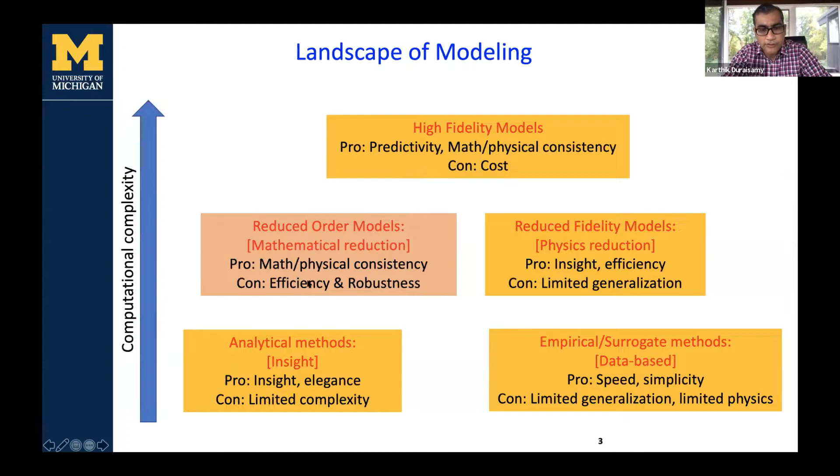All right, now before we start talking about reduced order modeling, let me spend a minute on the broader landscape of modeling. Of course, at the very top, we have the high fidelity models, which are expensive in many problems, but also intractable in others. And then we have two classes of models, and I want to make a quick distinction here because sometimes there is a tendency to mix the two. So we have what are called reduced fidelity models, which rely on physical simplifications like asymptotic analysis or going from 3D to 2D. And then we have reduced order models, which are a more mathematically formal reduction, which means we're going to be solving the same set of equations as the high fidelity model, but on a much lower dimensional manifold. So this is what I call reduced order models, and this is going to be the focus of today's talk.

Now, as far as reduced order models go, there are a very large number of ways in which you can develop them. I'm specifically covering projection-based reduced order models. So you have a given high fidelity model. In some of the applications I'm going to show, you have 100 million or 1 billion degrees of freedom. And then the hope is we can find a low dimensional manifold, and that manifold is informed by data. Then we project these governing equations onto that manifold, and you go from solving an equation with n degrees of freedom to something with k degrees of freedom. In the examples that I show, we basically go from 100 million to order of 100. So the key thing is, how do we extract this low dimensional manifold? It can be done in many different ways.

The simplest way is to use a linear reduced basis. So you go from your high dimensional set of unknowns to a lower dimensional set of unknowns, and the transformation is through a linear basis. But this can be nonlinear as well. And then, as I said, we want to solve the same set of equations. So the challenge here is to ensure accuracy when k is much smaller than n, and also be efficient, because there are many ways in which you can project these equations to a low dimensional manifold, but the resulting equations end up costing the same amount of computational effort, because typically high fidelity models have a sparse structure, and reduced order models have a dense structure.

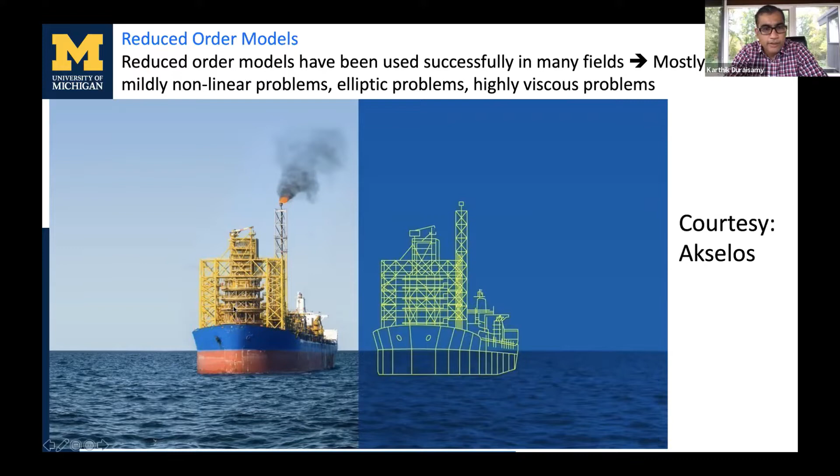Running a high fidelity simulation, as we do for one such injector flow field, has about 100 million degrees of freedom and takes about 1 month on a 1,000 processor cluster. The problem is a real rocket engine, if you take SpaceX's Merlin engine, for instance, has hundreds of these injectors. So to do these calculations, it's going to take pretty much a year of runtime even if you have a 10,000 processor system. So the challenge is not only that it is difficult to simulate these problems and they're highly stiff, it is that it may not even be possible to simulate the full system, but then we're talking about reduced order models for the system. That is the challenge that we are faced with.

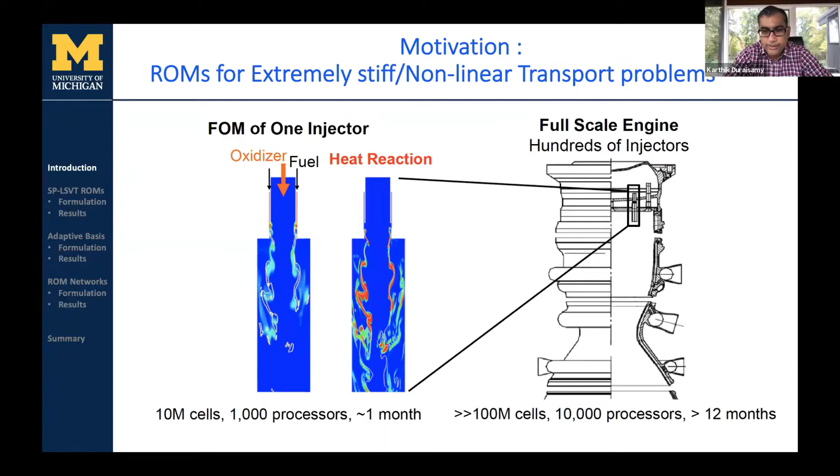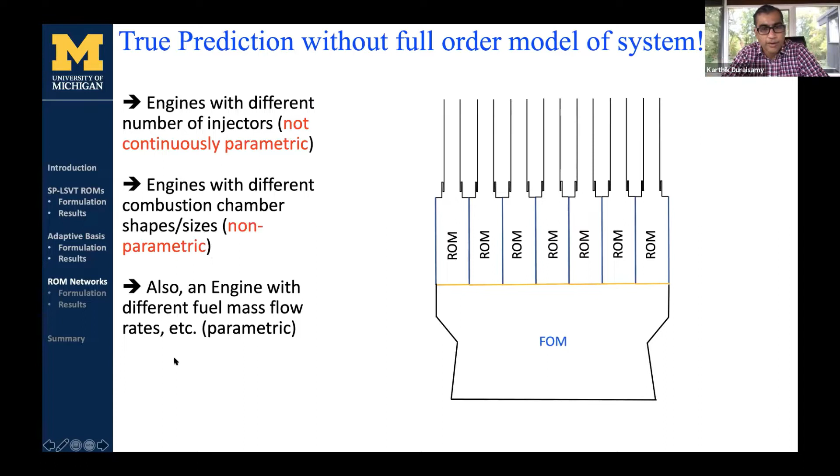And towards the end of this talk, I want to show that not only do we want to make these kinds of ROMs possible, we want to use those reduced order models to explore the effect of: what if I have an engine with 300 injectors arranged in a certain way? How does the flow field change when I have an engine with 400 injectors arranged in a certain way? So these are basically non-continuously parametric problems, non-parametric in the geometry, etc. These are the kind of problems that we want to tackle. All right, so that motivates reduced order models. Now let's go a little deeper into how these are formulated.

So let's say we have what I call a full order model. This is basically your high fidelity model equation. You can think about taking the Navier-Stokes for that rocket, discretizing in space, so you end up with a set of ordinary differential equations of very high dimension. And then, of course, you have to discretize the full order model in time, using a linear multi-step method or whatever your favorite method is. The first step, when you go with linear projection-based ROMs, is to take this high dimensional variable and write it as a decomposition.

The decomposition is you have a reference state, which is steady, so this is the steady part. And then you have a scaling matrix, and then your basis matrix, and then your k-dimensional set of, let me make sure I use a pointer, that highlighter, so you can see it. All right. So you go to a basis matrix, and then a k-dimensional set of unknowns. So this is the reduced representation.

And then there are two very standard ways of deriving the reduced order models. One is the Galerkin projection. You take this basis and use it as the test basis, apply it onto this equation, and you get this very simple set of equations.

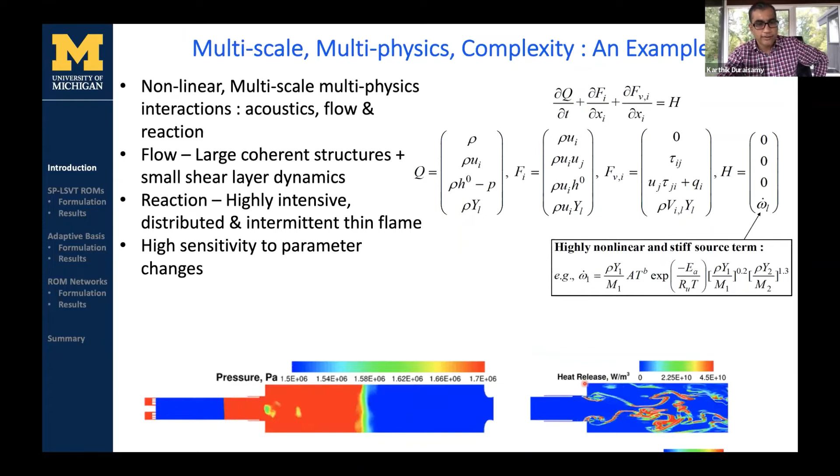So if you look at this image here on the right, and you look at the values for the heat release, I think it will give you an idea how stiff this is. So basically, the state of the art was not good enough to simulate these kinds of reduced order models.

Okay, so today's talk is, can we solve that problem? Can we solve that efficiently? And also, can we be truly predictive, right? By truly predictive, we have to not just predict things that we've not seen before, but we want to do so on geometries that have not been seen before. So that's the challenge that we're going to address.

So I'm going to touch upon 3 things. The robustness and accuracy, how do we make it work? And then adaptivity, meaning how do we make it predictive for future state? This is always the challenge with data-driven models, right? They're nice in principle, but when push comes to shove, they don't generalize well. So how can we address that?

And of course, how can we go after intractable problems using these reduced order models, and how can we enable them? So that's the plan for today. The 3 things to take home again are related to this. The high level picture is, we are going to introduce some new ways of formulating the ROM so that these kinds of simulations are possible. And we're going to be using adaptive bases. So earlier I showed you the basis V to be static, but then we make it adaptive.

And then the third part, we're going to be building reduced order models for these unit problems or components. And then we're going to stitch each of those ROMs together and integrate them as a network to predict things where, like I said, a full order model is not possible for the whole system. But by developing these component ROMs and integrating them, we can enable this. So that's the plan for today.

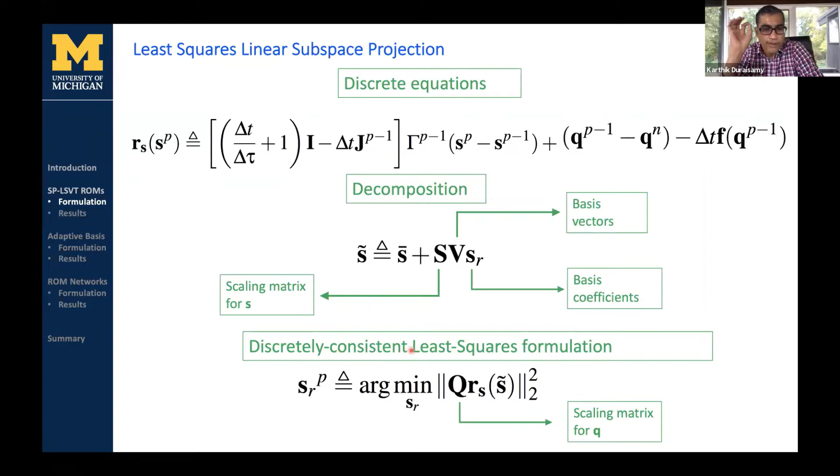So these basis coefficients can be static or adaptive. Just as I said earlier, there's a reference state, a scaling matrix, a basis, and a set of unknowns. Instead of Q, we go to S now. And then we introduce the least squares formulation, just like in LSPG, but on this system, the subiteration system. And then we minimize the residual to find what is the next update in the reduced basis that I need to make. Okay, so this is discretely consistent because every subiteration now is symmetrized.

If you look at the paper, there are a little more details, but at the end of the day, what ends up happening after we do all of those steps is you get a different test basis which changes in pseudo time. So this is how the basis looks at pseudo time level P-1. It has these multiple levels of scaling. And then the actual reduced order model after the projections looks like this, right? So you want to go from subiteration P-1 to P, and then you have these symmetrized transformations.

So after all the steps, as I mentioned, it's very important that we get discrete consistency at the subiteration level so that all the robustness properties and conservation properties are not lost. It's symmetrized and globally stable at the subiteration level. It's conservative. And if you look at the paper, we have some additional things that we do to improve local stability. And unlike the least squares Petrov-Galerkin method, we can apply this to explicit schemes as well, okay? I'm going to skip this.

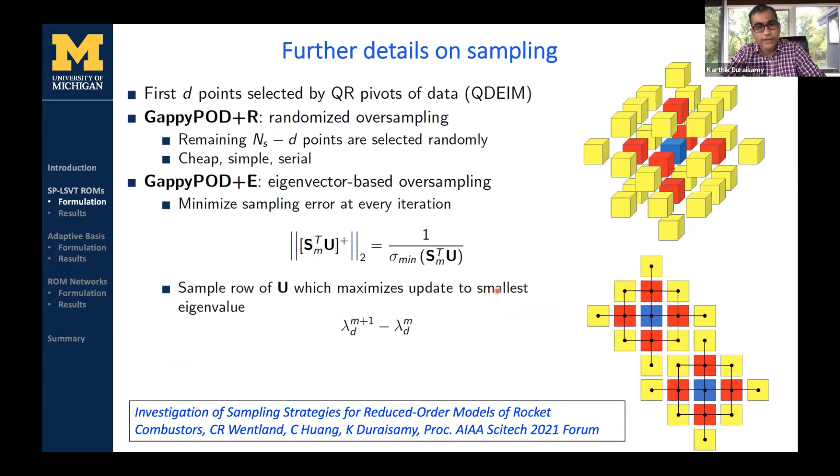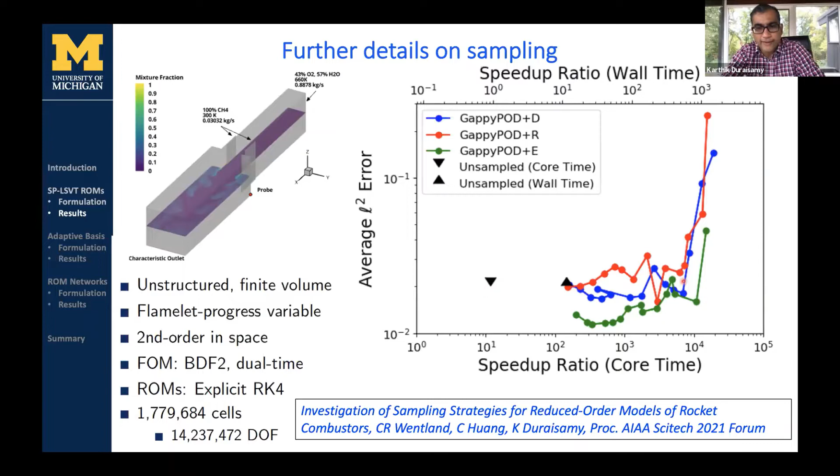So again, this is a little more of a nuance. If you want to reduce the cost of this ROM, you need to do some additional steps called hyper-reduction. It basically involves some kind of sampling. And if you look at this paper, it's very detailed on how we do it and how we implement it at scale. But the bottom line is, after doing all of this, at least for some problems that we've shown in the paper, we can get a speed up of a factor of 10,000 for very minimal loss of accuracy, for a very, very complex problem. So that's the goal. So now let's see some results.

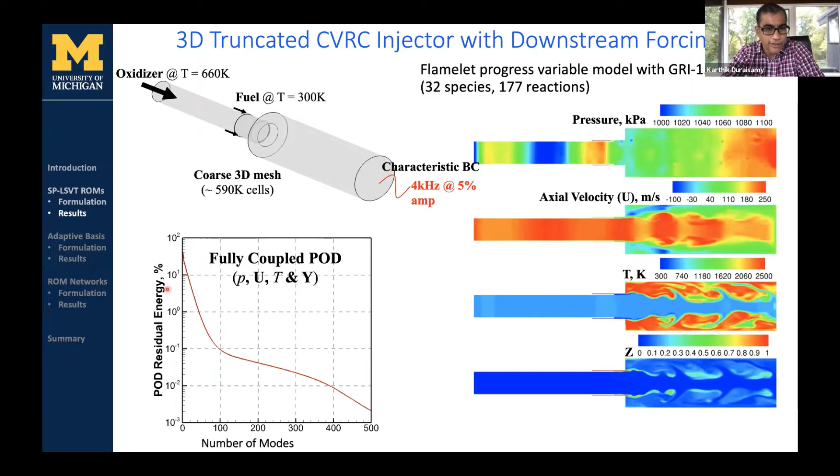So here is one of the problems that I showed earlier. It's a coarse version of it, so we can do a large number of tests. It's, again, a model rocket combustor. Oxidizer comes in here, fuel comes in here, reaction happens here. And this has about 5 million degrees of freedom because each computational cell has 10 degrees of freedom. There are some details here about what kind of kinetics model we're using. But the bottom line is we can achieve significant reduction.

So this is the error with respect to the dimension of the reduced order model. We can pretty much go close to a ROM dimension of 20 to get, I would say, less than 2% error in some of the quantities that we are tracking. And of course, if you go for a higher dimensional ROM, your error decreases.

So here are comparisons of the flow field. This is the full order model with 5 million degrees of freedom. This is the reduced order model with 20 modes, 20 degrees of freedom. And here is a reduced order model with 60 modes. The paper will have more information on how much the cost reduction is. In this case, we can report about order of 1,000 reduction in computational cost. Okay? So these problems are possible.

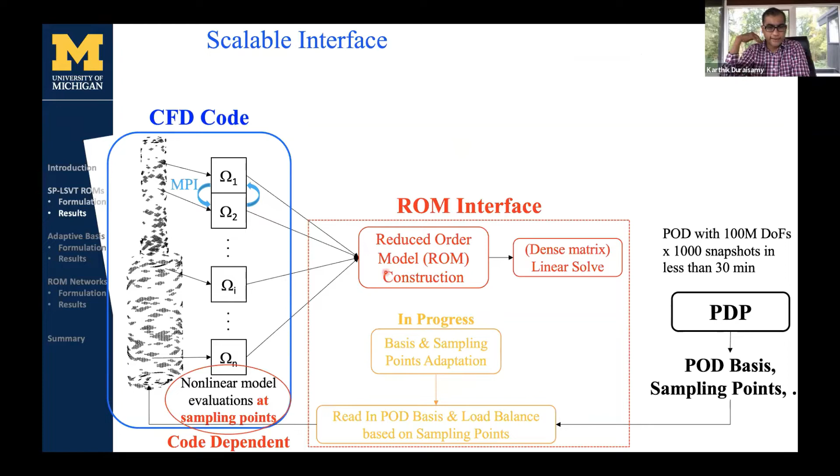And again, more of a nuance here. We built the infrastructure in a modular fashion so that it can scale and it can be used by others.

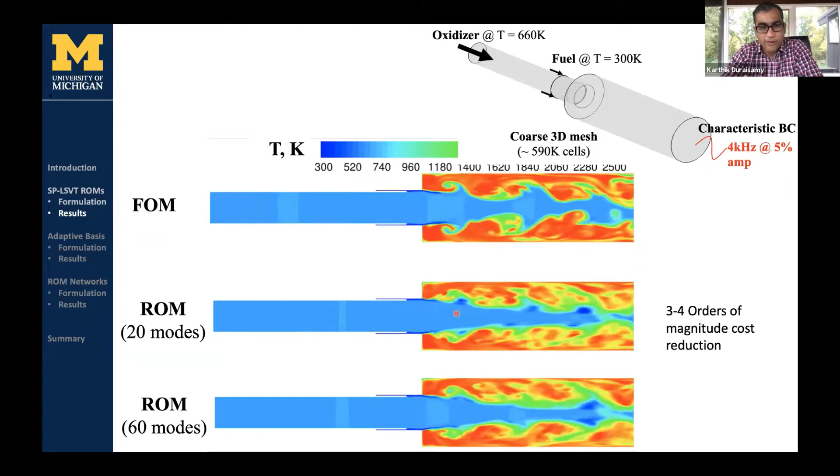Okay, so everything was good, but what are the disadvantages? So why do we need to do more? It is the fact that, of course, we're able to solve problems that were not possible to be solved before. But then if you look at prediction error, it's still reasonable, but in the future state, you know, during the reconstruction phase, this is basically the data that it has seen. It is able to give roughly about 1% error, but then the error increases. It is stable and it is still predictive, but the errors are somewhat higher, right?

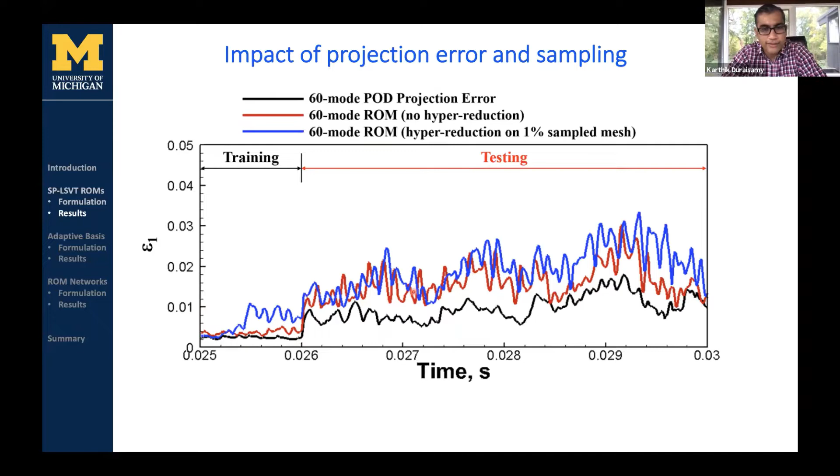And when we go to harder problems like the full-scale rocket combustor, this may not work so well, right? So how can we improve this? So that's the second part of the talk. One way to improve this is to go from linear to nonlinear manifolds. We've done the same kind of explorations, but I'm not talking about that. Instead, I'm going to be talking about adaptivity.

All right, adaptivity. So what's the idea? So for the ROMs to be truly predictive in problems dominated by convection, transport, multiscale problems, a static basis may require too many modes. Okay, so if you go from linear to nonlinear, that situation may improve, but then nonlinear manifolds have other issues, right? So making them very cheap is hard.

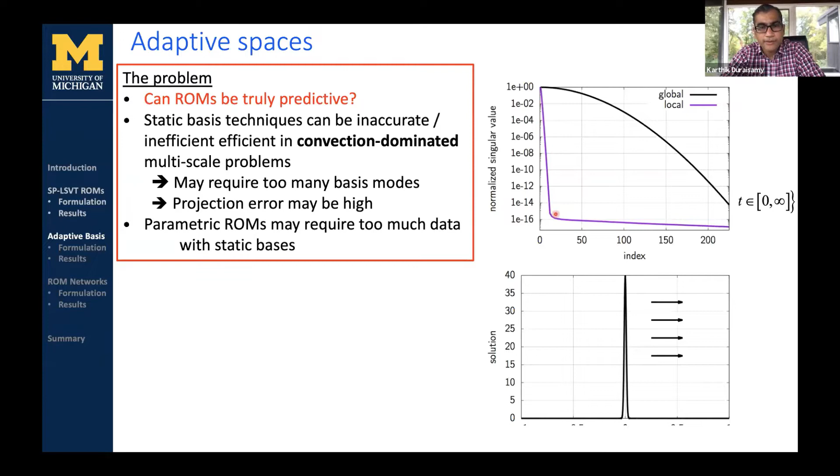Okay, so this is an example from one of my colleagues, Ben Peherstorfer. So he basically says if you just have a sharp Gaussian pulse that is moving from left to right, and you do a POD or a static basis decomposition, you would need to keep a very large number of modes to be accurate. Whereas if we have a basis that changes in time, you can get away with a much smaller number of bases.

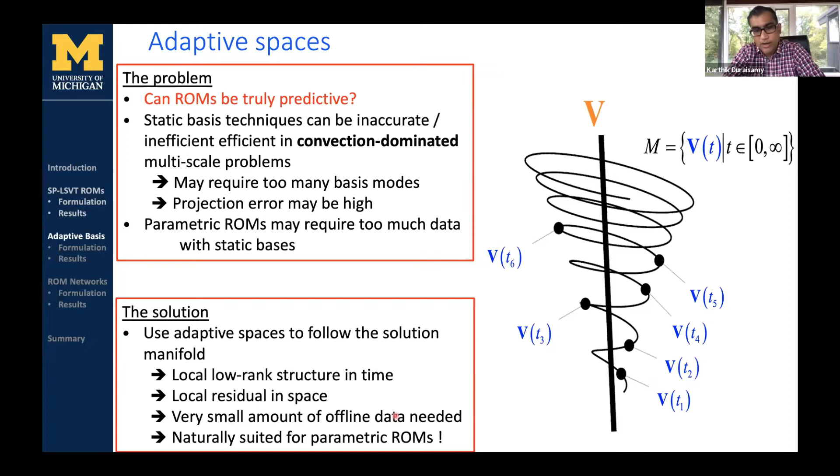And of course, for the adaptive basis to be viable, there are some requirements. There has to be some kind of low rank structure in time. And the residuals have to be localized. But the beauty of this approach is you require a very, very small amount of offline data because we're actually adapting on the fly. Okay, so the main formulation is in this paper by my colleague, so I will defer to that paper for a lot of the detail, but I'm just going to give you the high-level idea here and then show you the results.

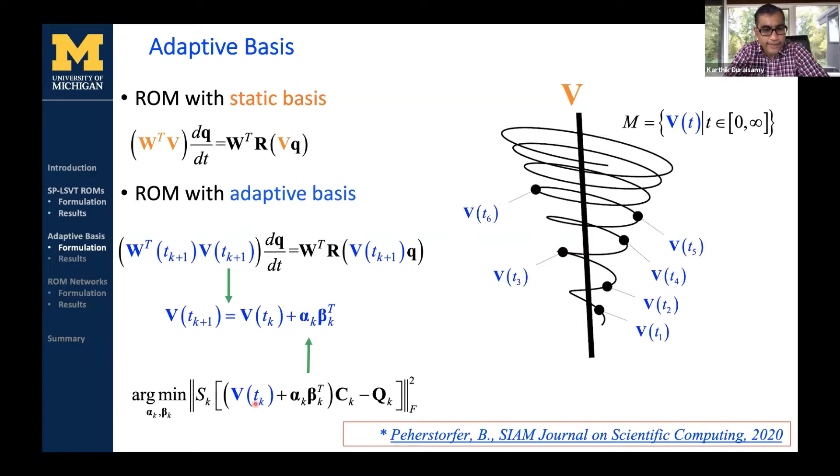Okay. So again, the idea is simple. We are still using a trial basis V and a test basis W, as I mentioned earlier, but these become functions of time instead of just being static. And I just explained it in the previous slide. And these bases are basically updated using a rank 1 update at every time step. And these updates, alpha and beta, are derived by solving a small optimization problem infrequently. Okay, so you don't do it at every time step, but every n time steps, you're going to be solving this optimization problem, which is nothing but a minimization of the residual. And there are techniques to solve this very fast.

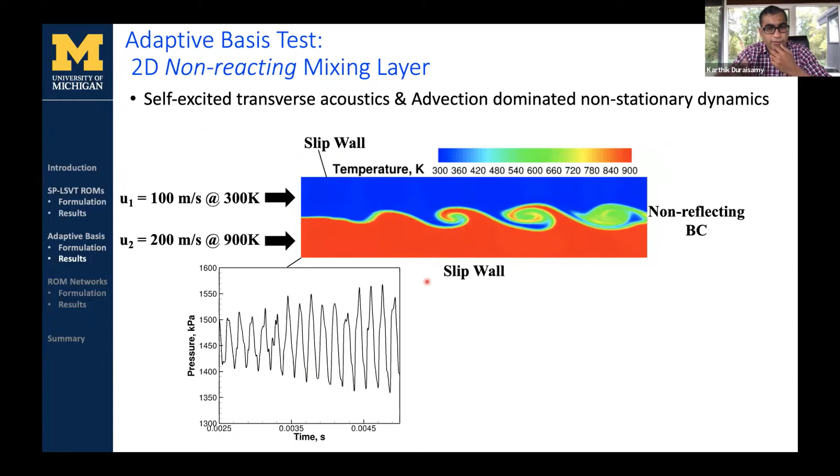And here is an example that looks simple but is incredibly hard to get with projection-based reduced order models. It's just a 2D non-reacting mixing layer: you have two streams at different velocities and temperatures mixing. And if you monitor the pressure at some probe location, it is highly chaotic, right? So it's hard to predict because the future state has not been seen before when the ROMs are predicting.

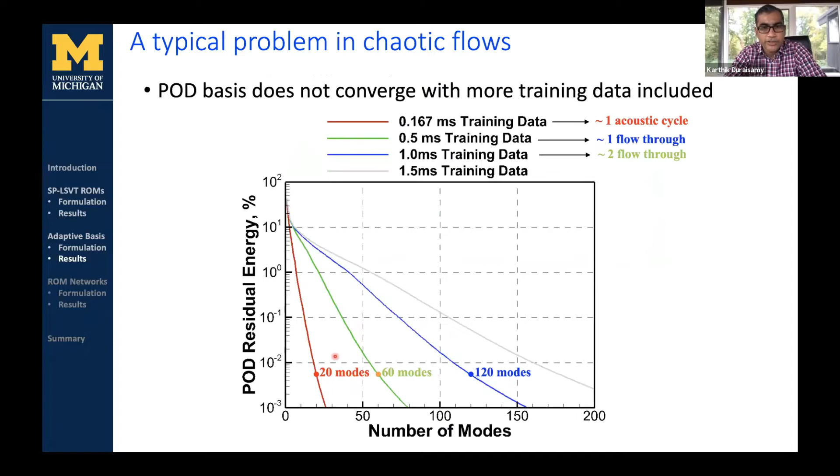So here we basically train the reduced order model only for this instant. This red spot, 0.167 milliseconds, is the training data. So the rest is pure prediction, and it does very well. Whereas if you look at the static basis reduced order model, even if you go to 60 modes with more data, or even 120 modes with a lot more data, you're still struggling. So that again tells us that adaptivity works. But there are still some challenges in making it as efficient as the static basis reduced order models, but we're working on it.

And now we're doing true prediction. So what if we just train the adaptive basis ROM offline using that data on a different problem, and then suddenly I change the velocity of this stream to some number that was not in the training? The adaptive basis still captures it, whereas the static basis really struggles, and it's trying to solve a different problem. So that's a step towards true predictivity.

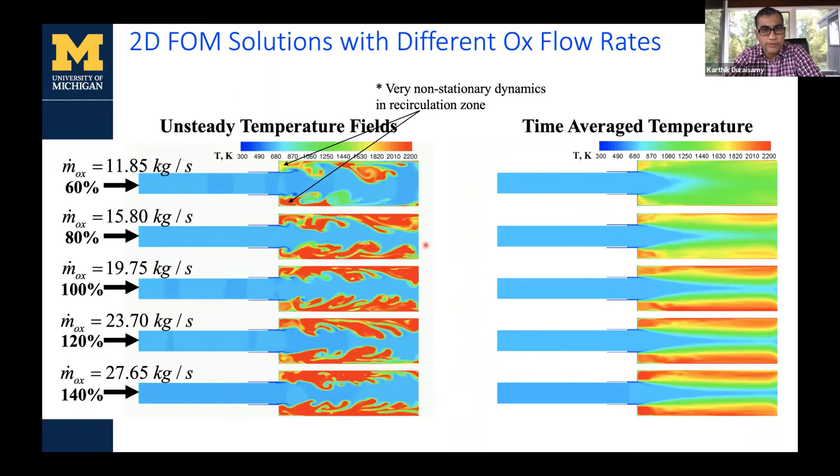Some more results here, which I will skip in the interest of time, but again, driving home the point that for much more complex problems than what I just showed, the adaptive basis really has the potential to be truly predictive. A lot more results, but the point I want to make is, yes, we can make true predictions, but it is not as if we're obtaining a speed up of 10,000 or 100,000 that I showed earlier. The speed ups that we're able to achieve currently are mild, order of 10 maybe, but we're working on techniques to make it even faster.

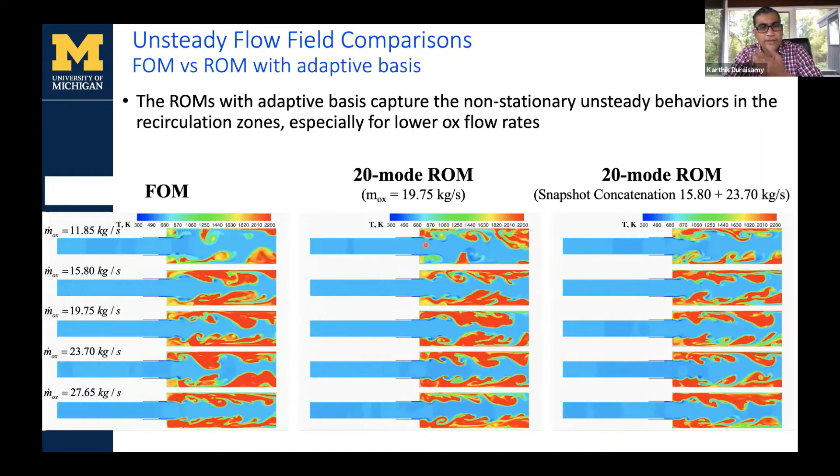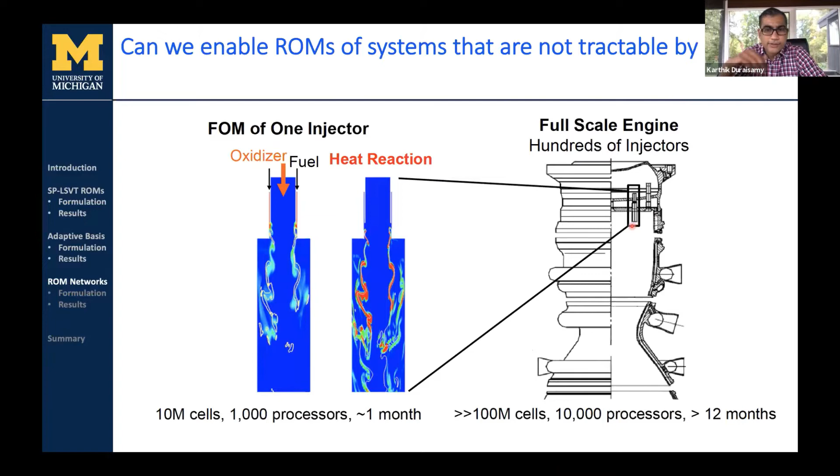All right, so now the third topic, which is tractability. Let me remind you what the tractability challenge is. I told you that simulating the flow field of one injector takes about a month on 1,000 processors, whereas the full-scale engine takes a year on 10,000 processors. So it's not possible to have the full order model. So can we still construct a reduced order model of a full-scale engine?

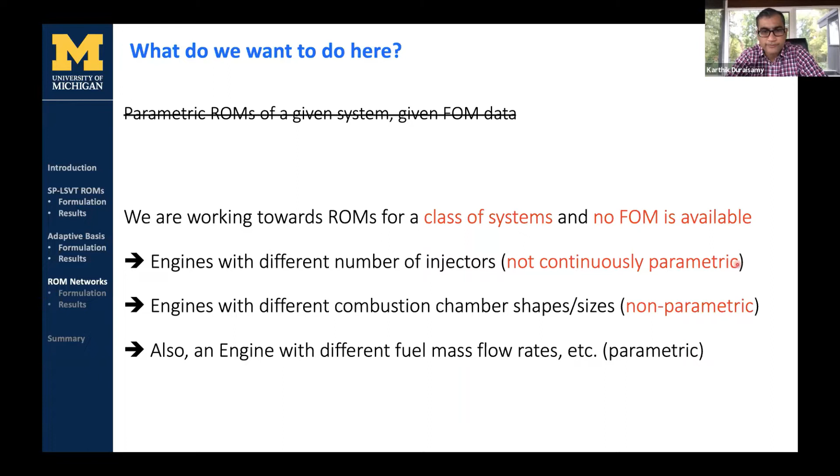So this is not a standard parametric ROM problem, right? We want to be able to use these ROMs to solve a class of problems, a class of systems. Of course, we can't do a ROM for everything; it has to be some class of system. And we want to use that ROM to study a rocket engine with different numbers of injectors arranged differently. We want to analyze engines that have different combustion chamber shapes and sizes that change in a non-parametric fashion. And we also want to study an engine with different fuel mass flow rates. This is more a standard parametric ROM problem, but there are many other things that we want to do.

So what is the approach that we take? We take a unit, which is one injector, as I said. We are able to do a full order model of an injector. It's still expensive, but it's possible. So we're going to take the full order model, and then we're going to give it all kinds of artificial forcing, right, to simulate the kind of things that it is expected to see when it is deployed in the full scale setting.

So we may want to force the full order model in transverse direction to excite the span-wise dynamics that you will see will happen in the full scale system. We also want to give characteristic perturbations so that the downstream responses are simulated. And we also want to ensure that there is enough small scale content.

Okay. So we basically develop these full order models for these unit component problems, and then we develop reduced order models of those components. And then, as I mentioned in the beginning of the talk, we stitch together these reduced order models and integrate them so that we can do a full scale engine, right?

So of course, the highly geometry dependent parts that I've shown here, we can use a full order model because the physics here is mostly acoustics, right? And acoustics, even though the perturbations are high, you don't require extremely fine discretizations. Here is where you have that incredible amount of heating and stiffness and reactions and all of those, whereas here you just have mostly acoustics.

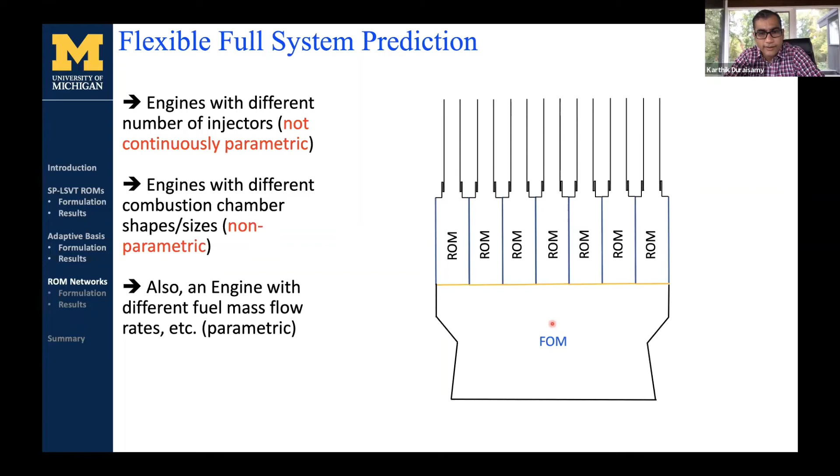But like I said, we want to do different kinds of arrangements of the ROM to do the engine with different injectors. And of course, we can also do combustion chamber shapes that we can analyze. Okay, so that's the goal. And here is how the approach works. Again, before doing this big problem, we want to do this in a smaller scale problem.

So we basically took a quasi 1D rocket combustor. And of course, you don't have all those reactions in quasi 1D, so we basically added some type of a heat release that is oscillating. So what do we want to do? The challenge in this problem is I want to train a reduced order model for a small domain, and I want to use the reduced order model to analyze how the system behaves when the combustion chamber length is increased or decreased, okay?

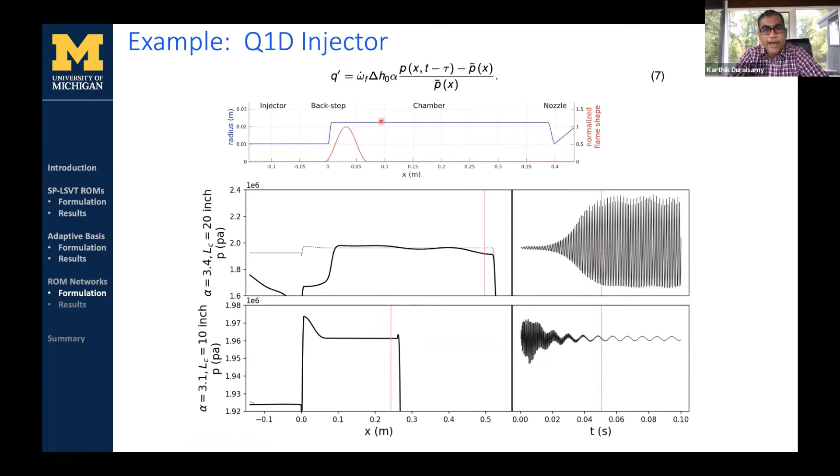And these are geometrically different, right? So we want to develop a ROM of a small part, and we want to use the same ROM with the geometrically changing parts. So this is how the approach works. We take this part, which is common to all the engines that we want to simulate. We run the full order model with various perturbations of this truncated domain. And then we train a portable ROM, and then we stitch together this ROM with this full order model, okay? So again, the reactions are happening here, and here it's just acoustics.

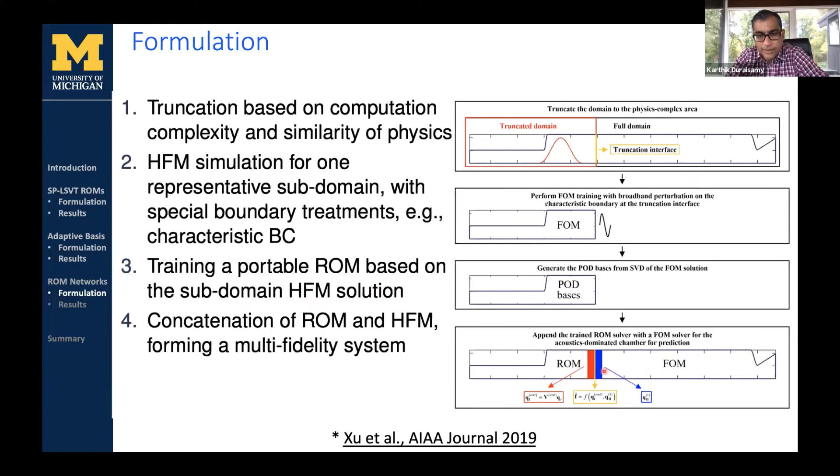And then we can stitch together this ROM with different combustion chamber sizes, and we still want to be able to replicate that behavior. And all of this is in this paper. I can give you the full reference, but if you look for Xu AIAA Journal 2019, you'll see this. Okay.

And again, if you look at the results in the paper, you'll see that the reduced order model is able to do a really nice job predicting the unstable behavior in the long chamber and the stable behavior in the shorter chamber. Actually, both of these are unseen, but beyond the perturbation frequencies we introduced in the truncated domain training, the multi-fidelity model was able to make great predictions even outside of those frequencies. And the reason why this is possible is because we're still solving the equation, so there is still some physics to save us.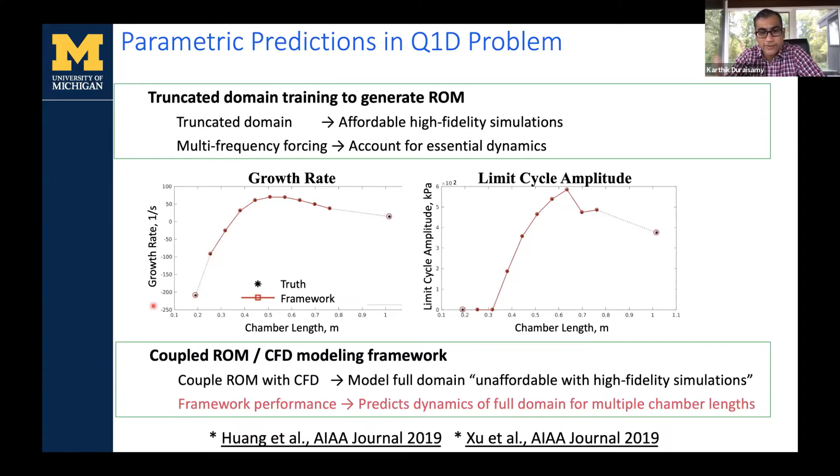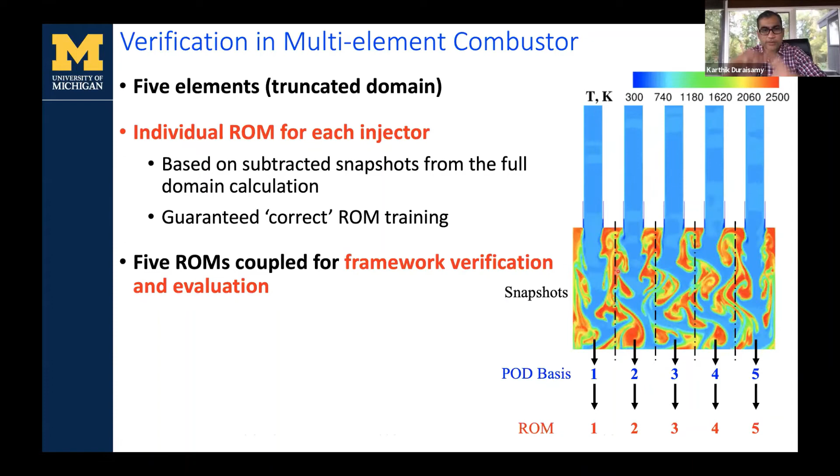All right, so now how do we do this for the full rocket combustor? Same thing. Let's say I have a rocket combustor with 5 injectors. Can I just build ROMs for some of these units and then put them together and use them for prediction?

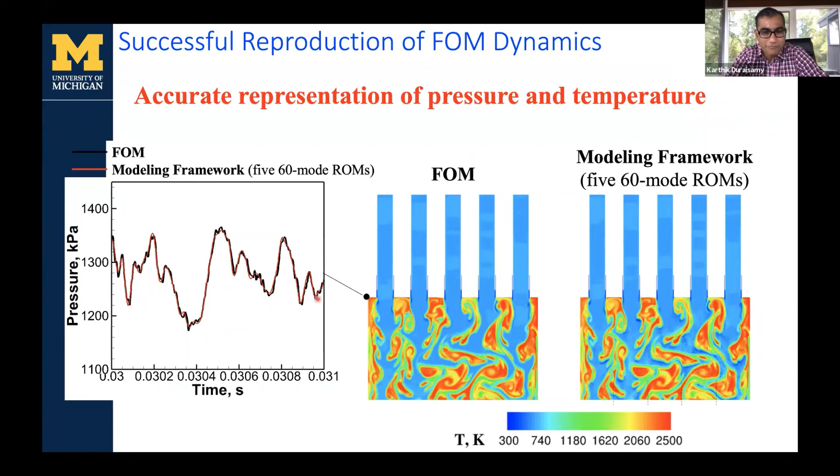So here is first the sanity check. The sanity check here is we broke this down into 5 individual injectors. We trained them, and then we put all of those trained 5 injectors together, and we can recreate this. So it almost looks like an innocuous exercise, but it took us 4 years and many millions of dollars to get here. And we can do that very well. When we build 5 individual ROMs and stitch them together, we can basically nail it.

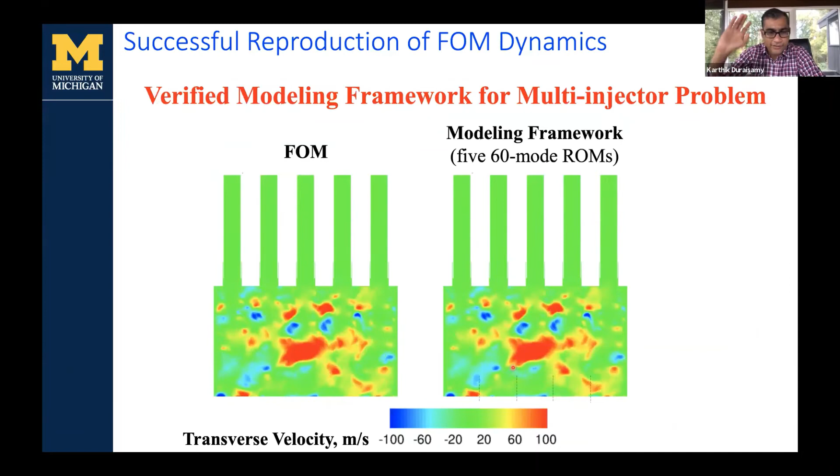So that's an accomplishment, but it doesn't help anyone, as it does not help the Air Force engineers, for instance. And we can also do future state prediction, which is nice. But then the real challenge is, you know, we want to do this problem with hundreds of injectors, and you want to train just a few.

Okay, so this is how the strategy would look. Clearly, the injectors in the middle of the injection plane would see different physics from injectors that are right on the walls. So there have to be at least 2 types of unit domains that we have to consider, right? One is the interior ROM, and the other one is the wall element ROM.

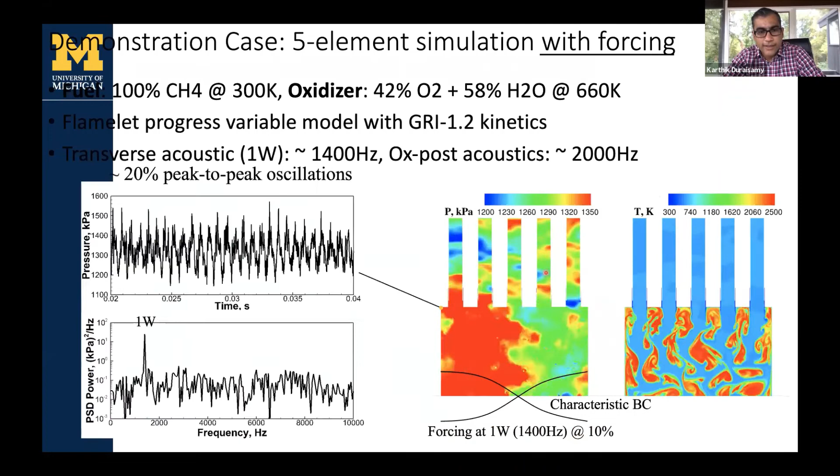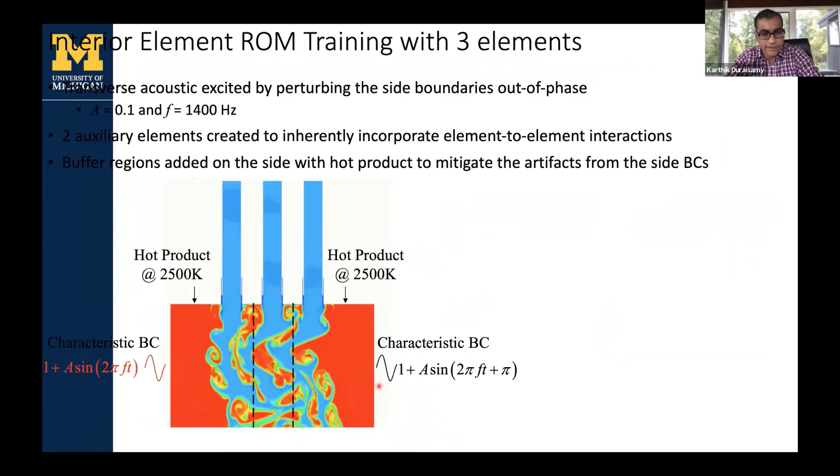Okay, so we still haven't solved Elon Musk's problems, but what we're doing currently is, as I said, assume that this is the injector we want to simulate. First, we create a training for the interior component, with perturbations, of course, because there is span-wise dynamics in the real system. And then we train a reduced order model just for the injector on the wall, and that is also done with forcing.

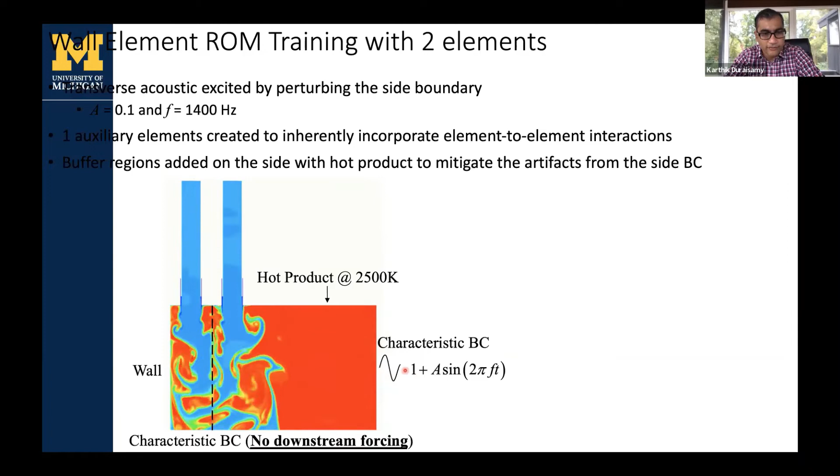And so we basically now stitch them together, right? We just trained 2 components: an injector ROM and a wall ROM. So then we put 3 of those injector ROMs in the middle, and then we put this reduced order model on the left that we trained, and then we mirror it. When I say we are mirroring the reduced order model, we are just basically transposing the bases to reflect the coordinate system.

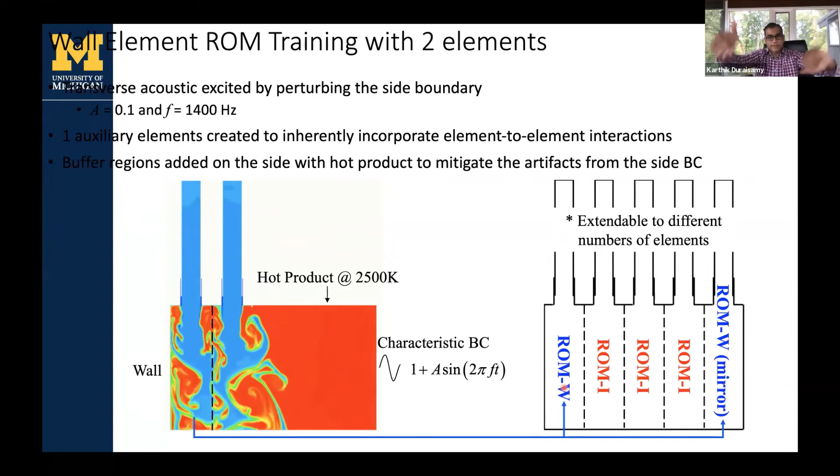But this is still a chaotic problem, right? So the mirroring does not mean that you're seeing everything that you're supposed to see. But this general approach is scalable to a large number of injectors in the 2D setting. In 3D, you have other things to worry about, but again, it's a start. And long story short, with such networks with adaptive bases, it is possible to be predictive.

So this is the full order model. And then here is the ROM network trained using just 2 component ROMs, replicated, stitched together, and then deployed to do the prediction. Black is the pressure at one probe location from the full order model. The gray is the ROM network. And this is the power spectral density of pressure. So the ROM is not perfect, obviously, because there is a lot happening, but it's picking up all the essential features that we care about.

Again, I don't want to give the impression that this problem is solved, because the training, the networking, everything works well, the adaptive basis works well, but adaptive sampling is required to speed up the adaptive basis. So that's something that we're actively working on. So it's not a solved problem in terms of efficiency, but in terms of being able to do future state predictions and replicate behavior for a model with unknown full order model, we can do this.

All right, so let me summarize here. Why are we doing this work? First of all, the extreme stiffness, nonlinearity, and multiscale nature of the problems that we're going after poses robustness and efficiency challenges. And existing static and linear manifolds are ill-equipped for predictivity. And we want to do ROMs of systems for which you cannot afford even a single simulation of the full order model. So what are we doing? To address all these robustness issues, I introduced to you an approach that we call model form preserving least squares with variable transformation.

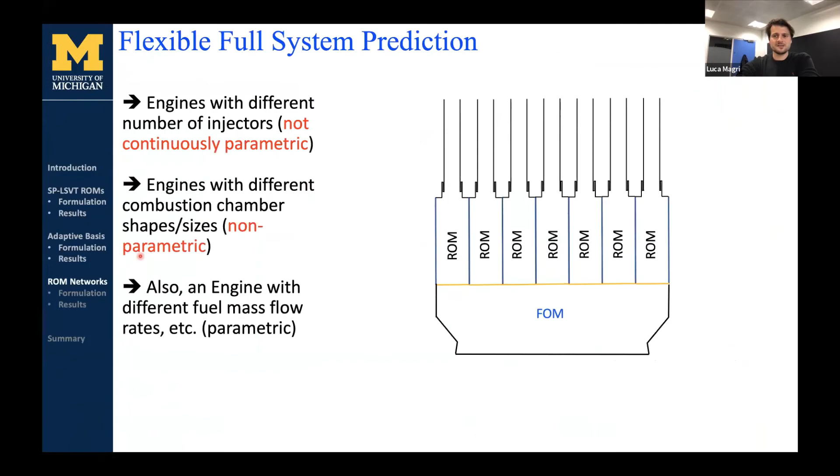And George Papadakis is asking a question on chaotic systems, which I had myself as well. Regarding the predictability of chaotic systems, of course, this depends on the size of the unstable Lyapunov exponents of the system. So how many, and also, how big is the unstable tangent space. A reduced order model will introduce small deviations with respect to the full order model. So is it realistic to expect that the reduced order model will follow the real system for a long time? And isn't this limited by the very nature of chaotic systems, which are linearly unstable?

Yeah, 100% agree that it is certainly limited by the physics of the chaotic system. And I want to basically say a ROM will introduce small deviations. So it is certainly not realistic to expect the ROM to follow the real system for a long period of time.

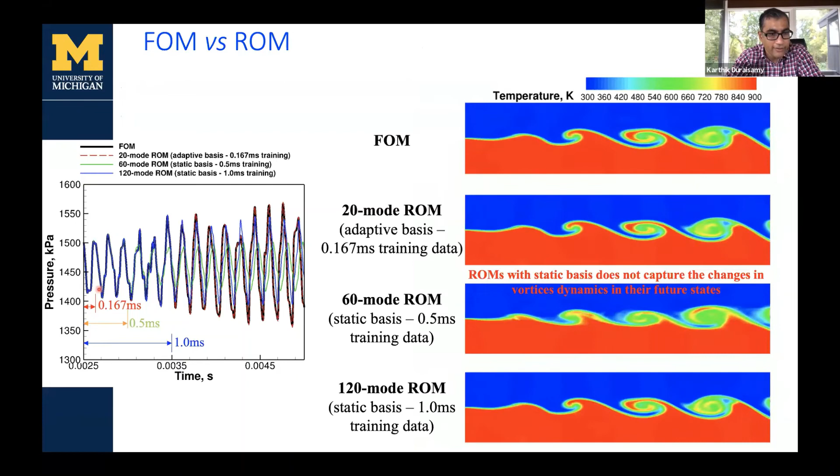100% in agreement if you have a static basis, okay? But with the adaptive basis, because we have the full equations at our disposal, it is possible to get these small deviations to be very small. So maybe if this is a really chaotic system as I showed you, we are just using the training in this region, and then we are letting it fly. And of course, you do see some small deviations.

Maybe if we really march it for much longer time, you will certainly see some deviations. But the hope is we're not after every single deviation that happens in the flow, right? We want to make sure that higher order quantities of interest are captured well. So in that sense, adaptive basis can certainly get us there. But if we are going to replicate all the chaotic trajectories, whether we have a static or adaptive or nonlinear basis, whatever it is, there is no hope.

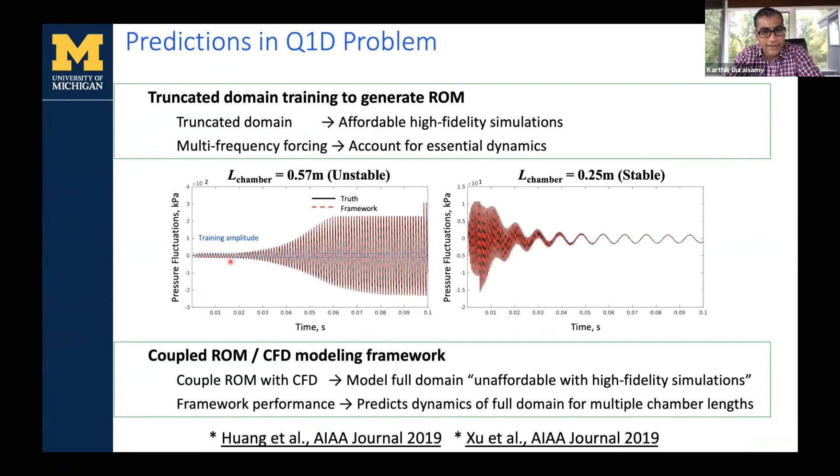But the hope is, we're after things like this. We want to make sure we capture this behavior, like this linear growth, nonlinear saturation. We want to make sure that we capture the important features, sorry, I'm skipping through here. We want to basically capture the important things, but we'll never be able to follow all the trajectories. And I don't think that answer is going to change in 2 years or 15 years, but we can get quantities of interest modeled well. Good question, and certainly a comment I agree with.

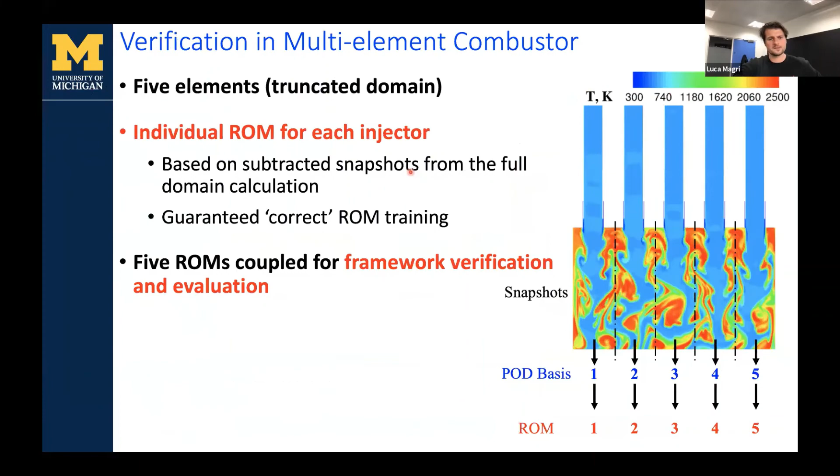Yeah, and I follow up on that as well. So did you have the chance to compare, instead of the time instantaneous solution, the statistics of the solutions, like even first order moment or second order, with respect to the full order model? Because that could be a more robust way in a chaotic system to compare as a metric of interest.

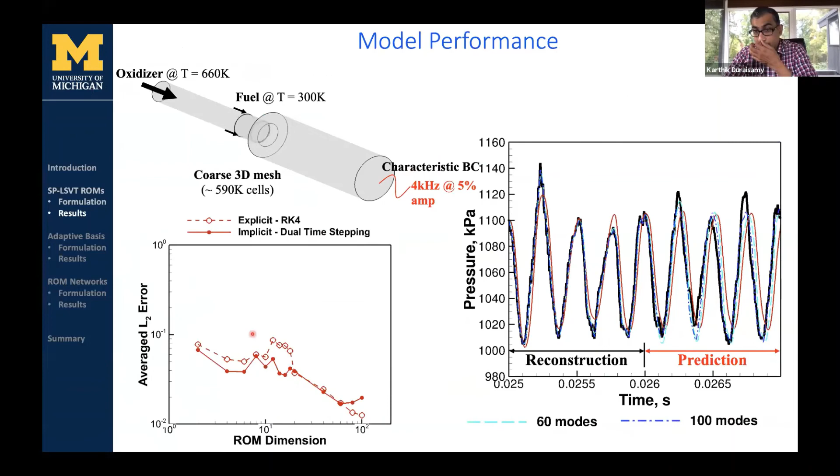Yeah, I think I didn't talk about it much, but when I showed some of these results earlier, they were basically like L2 norm of the error in the entire flow field and things like that. But again, there's many complicated things that happen in a rocket combustor. Sometimes if the wave that comes back is too strong, it can actually shut off the reaction, right? The engine can go cold. Whether we're able to capture all those kinds of features, I don't know.

But we've tracked moments and spatially averaged quantities and things like that. And again, I don't want to claim that we can solve all of this really well for these kind of complex problems yet, but we are making progress. Excellent.

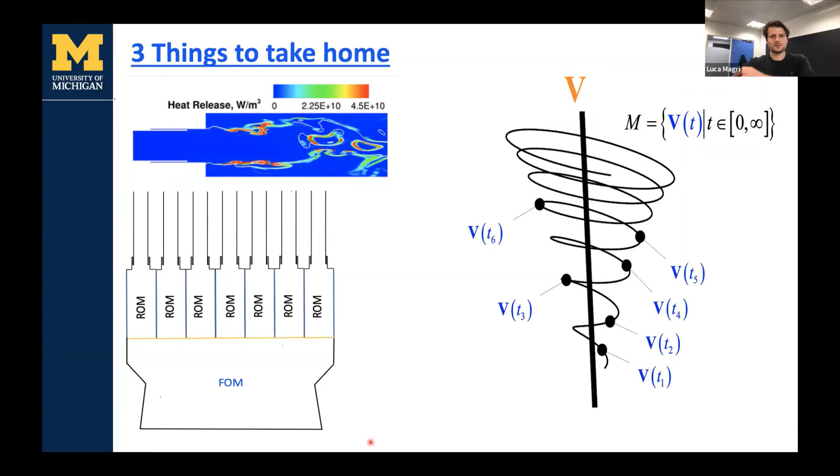Sorry, how do I turn off the highlighter? In PowerPoint? Oh, I don't use PowerPoint. Sorry, it's very hard for me to go back now. And even the escape is not working. Maybe you can stop sharing the screen. Yeah, even that is not. Okay, I think I was able to do that.

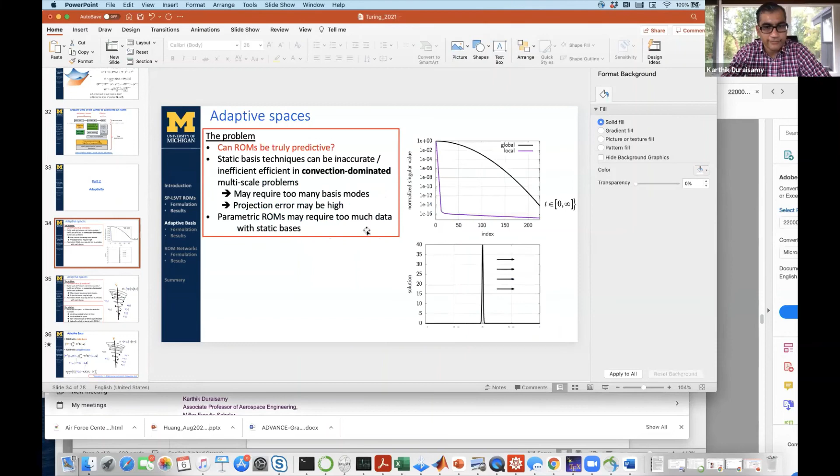Sorry. Yeah, so I would like to give a nice physically sounding answer to that, but at the end of the day, it's just too much dependent on the topology, right? So for instance, let's take this one. This is just a Gaussian pulse that's moving to the right. If you do a POD, you're going to see a lot of these waves, a lot of these modes that show up. And the perfect adaptive basis would just be one basis that just follows the pulse, right?

And this is a pulse, this is a linear advection, so there is nothing changing, right? So the adaptive basis would just replicate the entire flow field with just one basis. And the basis is actually the flow field at that time step. So that's why it becomes hard, because these problems are dominated by convection, and there are also a lot of these coherent structures that move around.

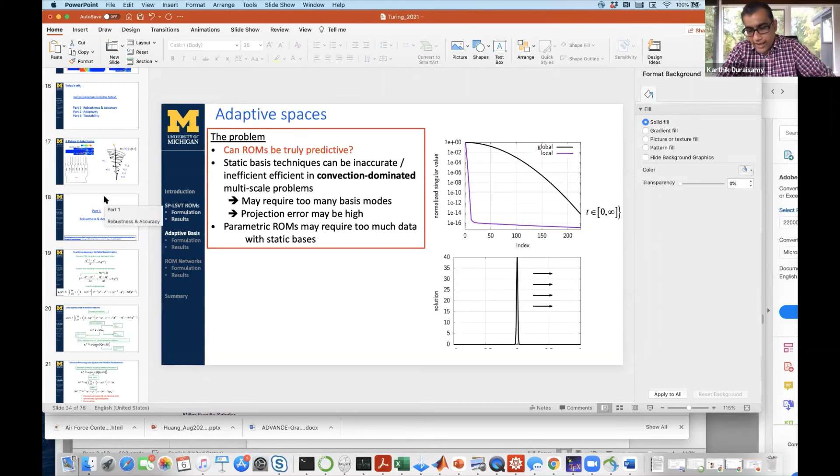So if we just had one or two things that are driving the flow, I think we can get a lot more physical interpretation out of these adaptive basis modes. But in reality, especially for these kinds of problems, it is just fitting, right? It's basically finding what is the best fit that I need to represent this particular snapshot. And after a while, that will change. So the short answer to your question is it's less physical and more, I think, fitting the image type of thing.

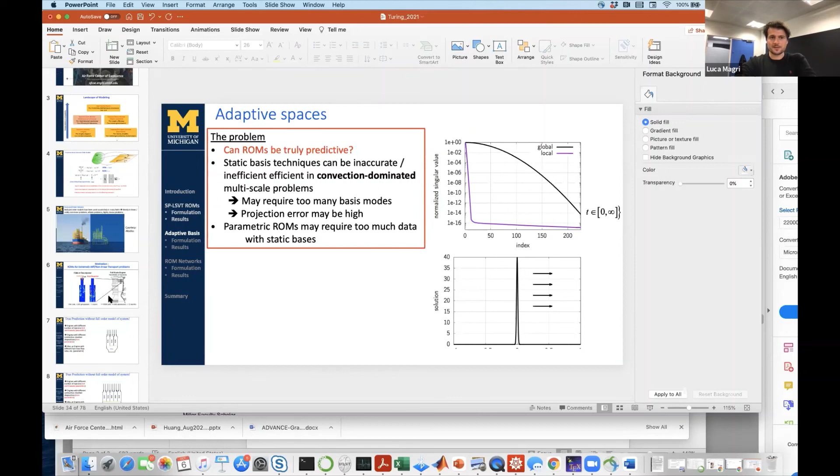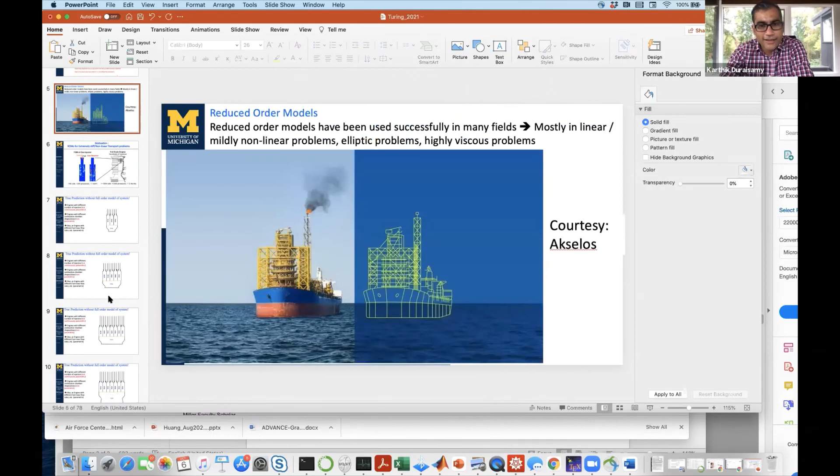So if I understand correctly, you mentioned that the reduced order models you want to devise are, eventually or even now, for real-time predictions, right? No, not real time. I mean, not in this work. Okay, I think it was mentioned at some point it was real time. Maybe I got hijacked there. So one question was what is the computational cost of solving the optimization problem for the adaptive basis? That was my question for real-time prediction.

Yeah, so let me answer the second question first, and then the first question. These are expensive problems, and we are actually going after ROMs of the full flow field, which means we can reduce this by a factor of 1,000, which is still far from real time. I must not have said real time in this talk, but we do real-time work in my company, Geminus.ai, and a few other projects. There, we don't go after the full flow field, we go after quantities of interest, a few quantities, and that can be done in real time.

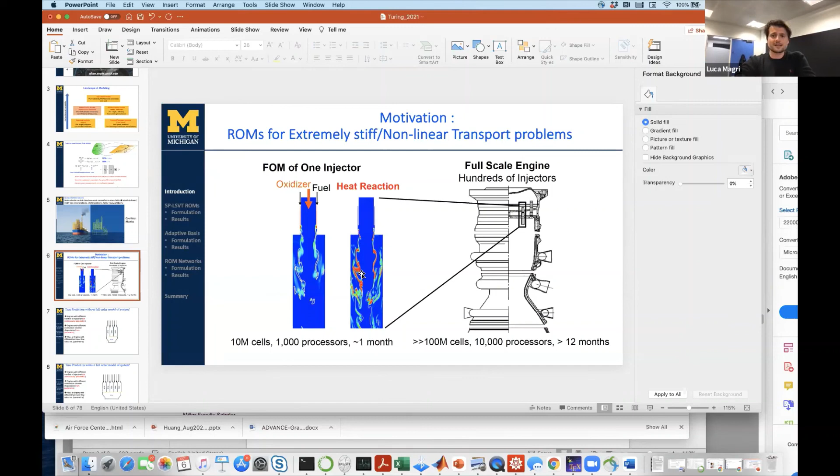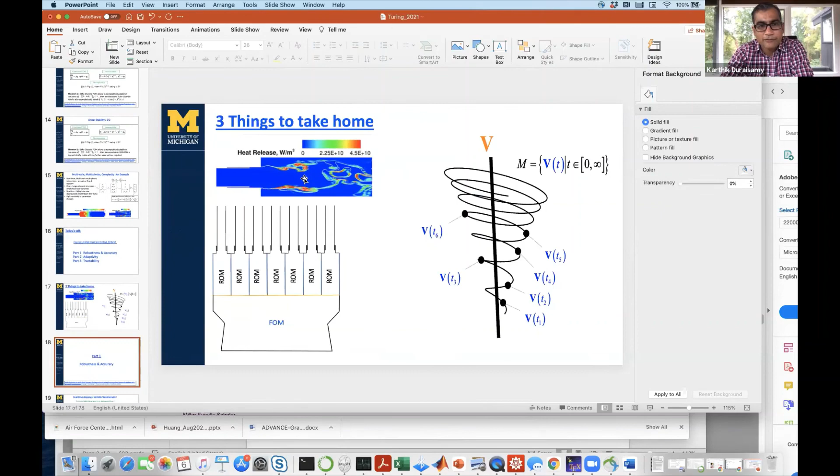But your question regarding the real time was? My question was for the adaptivity itself. Exactly. The adaptive basis is expensive. Maybe we've not achieved it in problems of this complexity, but for something like Euler, we're able to show that you can actually get good acceleration with adaptive basis as well. There are two parts to the adaptive basis. I just spoke about one, which is how to find the basis. And then there is also adaptive sampling, which is how do you solve that optimization problem with just a few samples. And Ben Peherstorfer's paper talks about how to choose those samples adaptively.

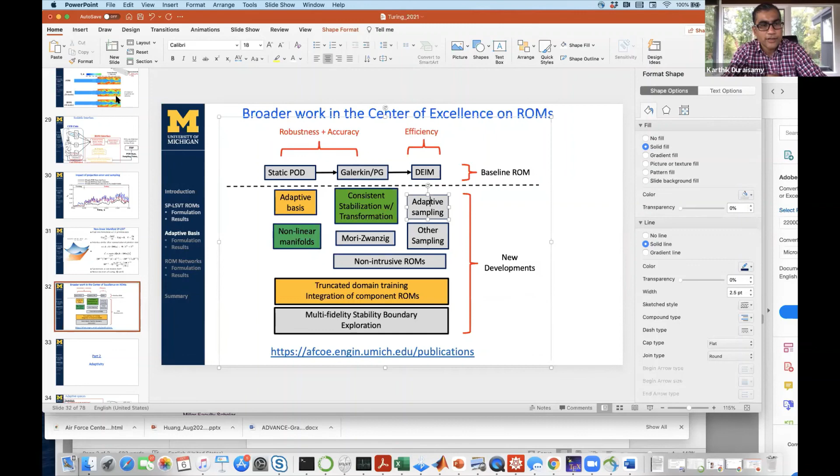So by adaptive sampling, you can reduce the cost of the adaptive basis. We've not reduced the cost of problems of this magnitude yet with adaptive sampling. There are still some issues to work out, but for simpler but still complex problems, we're able to get the adaptive sampling to give us low cost. But if you don't do adaptive sampling, the adaptive basis is going to be as expensive as the full order model. Okay, because you're effectively carrying the full order model at every time step. Yeah, exactly. That's my question.